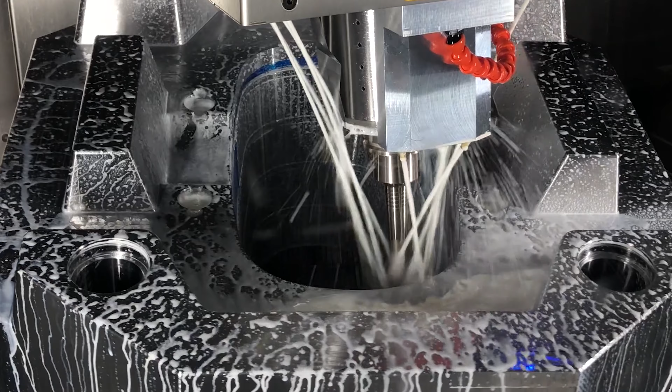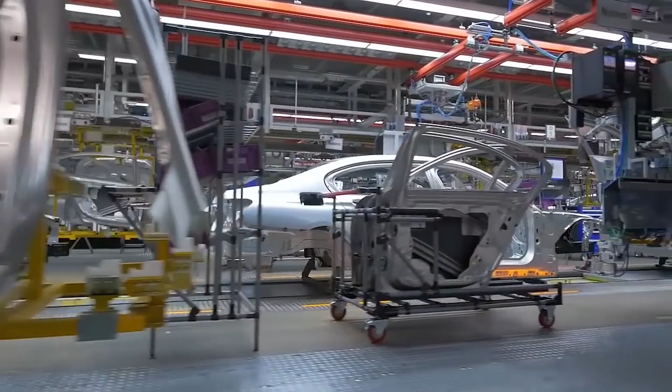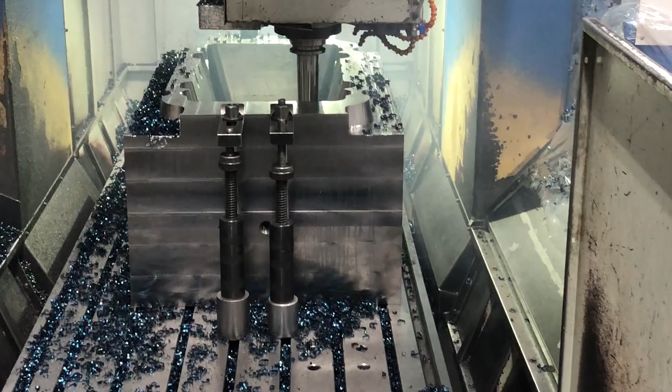We are in the industry. We are present in the past, present, and future of production. We are in the most valuable projects of our country. It's not just about tying up a piece. For this country, for 30 years, lovingly, love is to connect with heartily.

ER-EL, we produce quality in clamping equipment.

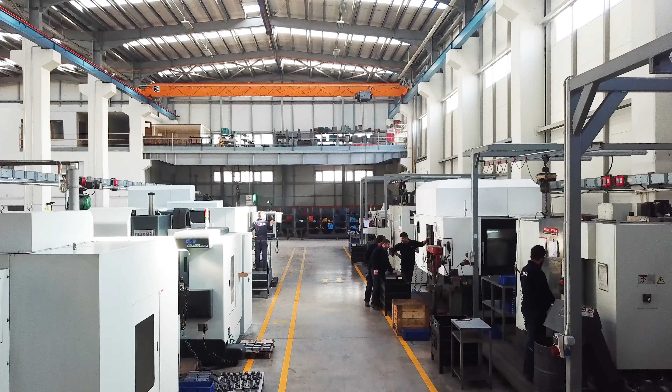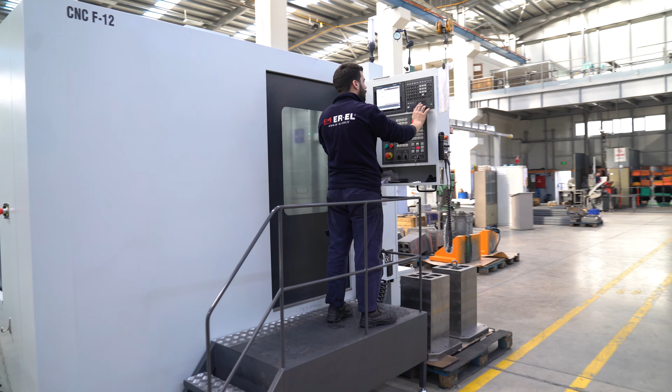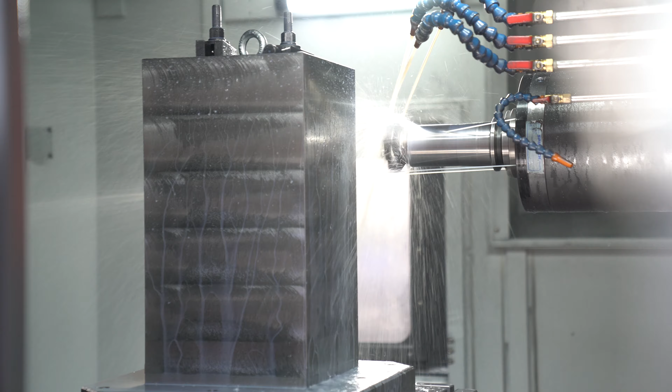Our company was established in 1989 in Istanbul. We produce products that make the symbol of trust and quality in mold and workpiece fastening equipment. In 2017, we moved to Kocaeli Dilovası, İMES Organized Industrial Zone, to our 5,000 square meter new factory production facility and management building. We work with superior performance for customer satisfaction by providing standard and project-based fixture solutions with our dynamic and expert staff.

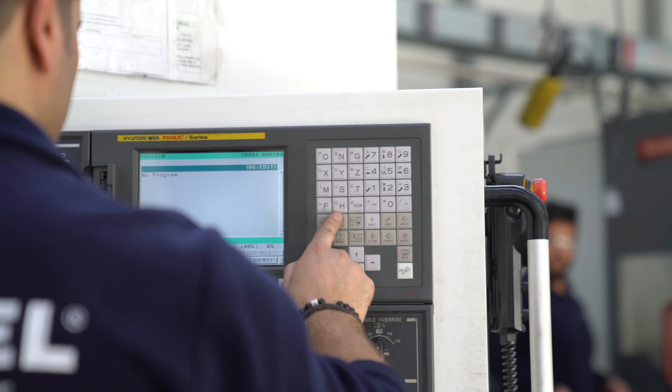ER-EL has been progressing more and more confidently with increasing capacity and total employment in the last years. Today, we export to more than 24 countries, especially European countries. We continue our efforts to increase product diversity with our R&D department, which is active in order to provide solutions that meet the needs and demands of our customers, each of which has a distinct value and importance.

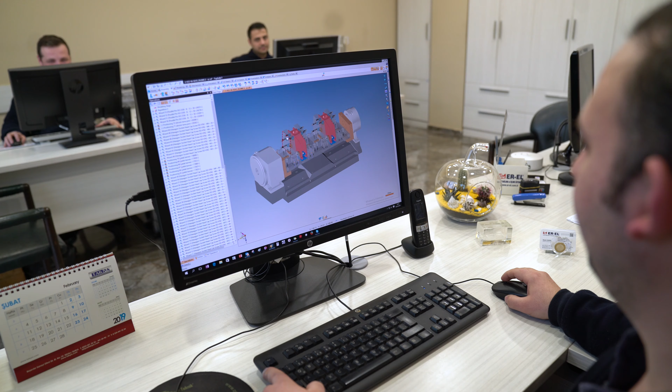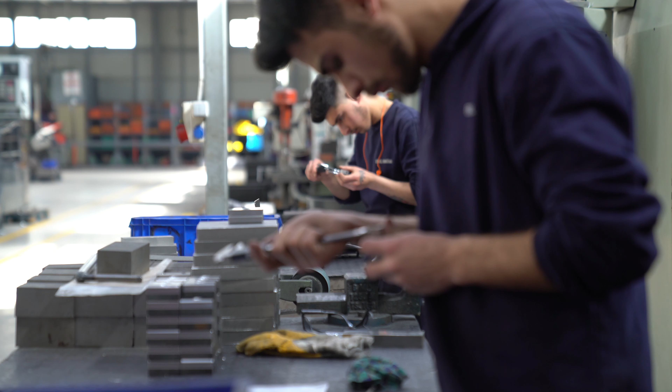As of today, we are proud to be a leading manufacturer company with over 3,500 product range in workpiece and mold fastening equipment. Mechanical, pneumatic, and hydraulic fixture products, which are specifically designed and produced for the workpiece, are used in many sectors such as defense industry, automotive sector, white goods, heavy machinery, and weapon industry sectors.

In addition to our standard productions, we also produce project-based fixtures.

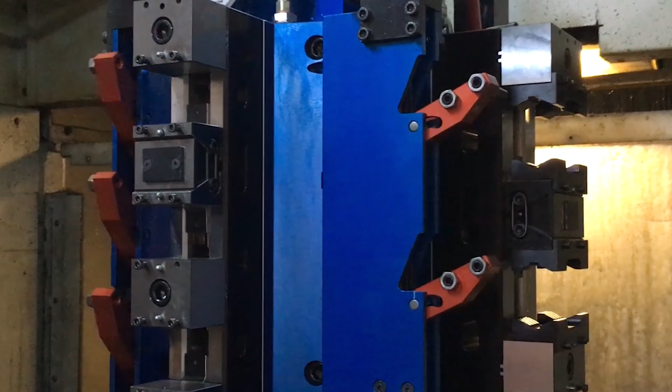With our product group optimizing system efficiency, we continue to produce world-accepted standards that are valid in the field. By increasing our investment on behalf of quality and safe products, ER-EL follows an efficient, sustainable path.